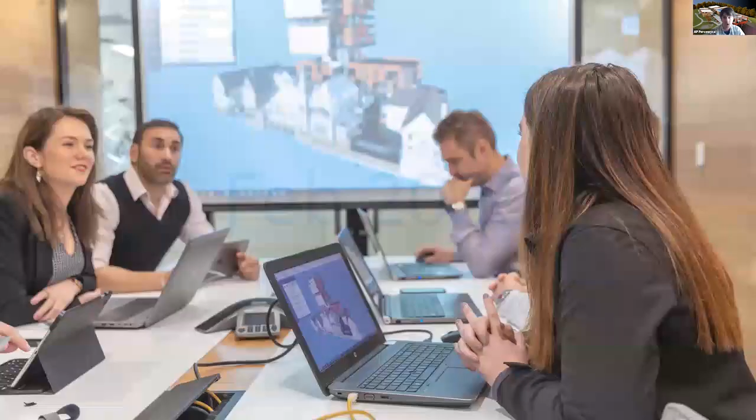So again, looking back, it's hard to believe that just a few months ago, we're talking about February, where a lot of our working environment was, air quotes, normal. It was kind of business as usual for most of us. A lot of us had projects that were mid-flight.

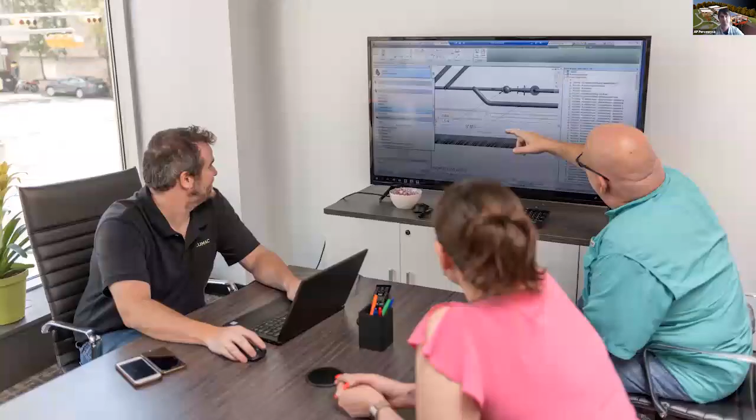We're still working in highly collaborative teams, most of the time on premises, in the same working environment, maybe going through things like design meetings, looking at site execution, planning, different review type meetings, working through design development, detailing, maybe coordination with outside companies, consultants that we're working with on a day-to-day, and even general production activities.

These were all centralized typically in office environments, where it was very easy to reach over a cubicle, reach across a table, and connect with a colleague to discuss a design issue. Even things like defining processes, looking at inter-team workflows, looking at kickoff meetings for projects - these are highly interactive, typically in-person meetings or needs that now we're all basically reacting and having to scramble to figure out what is that path forward. How do we effectively manage some of these processes again in this new working environment?

And I'm sure a lot of you can relate to some of those scenarios in terms of being able to work through it. And in the span of literally a month, from February to March, everything basically changes. This might be relevant to you guys - obviously we're on Zoom right now. This is a meeting that we had for a colleague that was actually switching roles.

Generally speaking, this would be our Denver office meeting together for happy hour. For this example, we're all just on a Zoom chat, trying to keep some level of connectivity, some level of camaraderie together as a group.

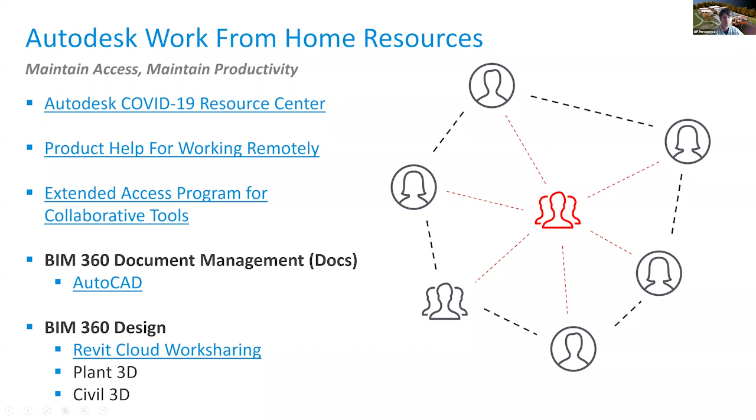All right, pushing forward. I'm going to try to get out of PowerPoint as quickly as possible for you guys.

It's not my preferred method of presenting, but we're going to start off talking briefly about the BIM 360 platform. For those unfamiliar, BIM 360 is meant to be an all-encompassing project environment, facilitating early design processes all the way through building life cycle into operations. We have a lot of customers that use BIM 360 to execute all the way through construction and then into operations, using this platform as basically a digital twin environment of their facility. Any ongoing projects operate through the platform, which serves as a common data environment for the entire project.

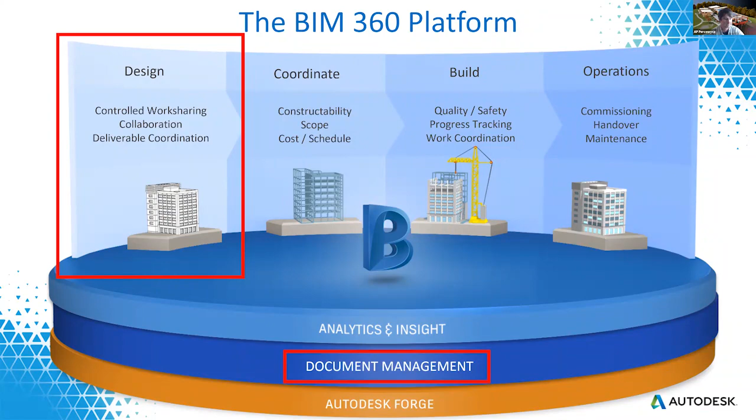Just to outline some of the other capabilities, we're going to focus on the top two highlighted, but this platform is meant to facilitate constructability reviews, run clash analysis on different trade or discipline models, track RFIs, track submittals, and shifting into construction activity, working on the construction management side of a project. How are we tracking things in punch lists? How are we assigning issues across different consultants or contractors coming into the project, making sure we have proper communication and tracking in a project environment. So generally speaking, a lot of capability there.

We're going to focus mainly on these top two, which mainly serve on the front end of a design project.

Mike, I see a couple things popping up in the chat. Is there any questions worthwhile to address right now, or should I keep pushing? It's up to you, they are on point from where you're at right now, but they can also wait till the end. Sure, yeah, let's go ahead and address them.

So the first question is relevant to BIM 360: is there any plans to migrate off of BIM 360 in the future?

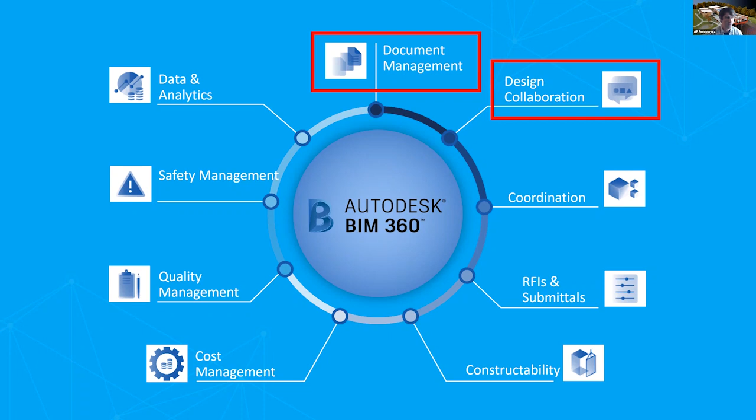So to start, guys, really I'm going to go into BIM 360 document management. You might hear me refer to it as docs. Really, this is the foundation, one of the foundational pieces to BIM 360, and it's generally the main access point into any cloud services from an Autodesk perspective. So I'm just going to pop open some slides that generally outline some of the capabilities within the document management service.

What's important to understand, first of all guys, is it is completely a cloud environment. So any web browser, any mobile device, iOS, Android, you can basically connect into your data structure, anything that's been uploaded or populated inside of BIM 360. And what you guys will see on screen is a general folder breakdown structure that hosts your files. Nothing super fancy right off the bat.

But it is important to understand that it is built to not only facilitate the work-in-progress motions that design teams need to go through to progress designs, but it is meant to distribute documentation to outside parties as needed. So everything within the system is permission based, and you can manage that at a folder level. So if there are certain places where you don't want everybody, maybe consultants, maybe a client you're working with, to see certain pieces of information, you can manage that in terms of the permissions those users would have in the system.

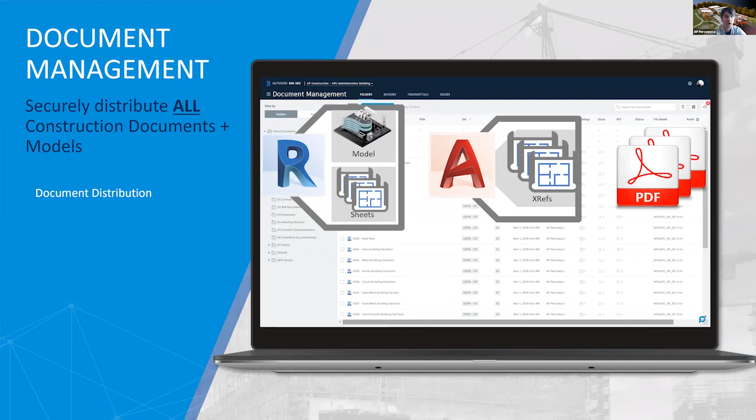Much like a Bluebeam type motion where it links a lot of the documents together, I can manage the sets associated with this data. So if I have a model that is my addendum number 1 that I want to distribute out, I just select what sheets I want in Revit, upload it into this environment, and choose to have the set affiliation come through as well. That makes the document management process a lot easier to manage.

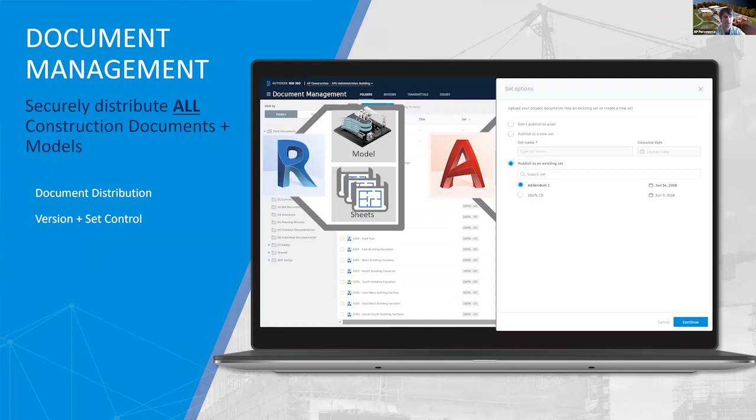I already touched on it, but permissions are a big piece of this, right? So if I want to restrict access to different roles, to different companies that I might be working with, I can certainly customize that out as needed.

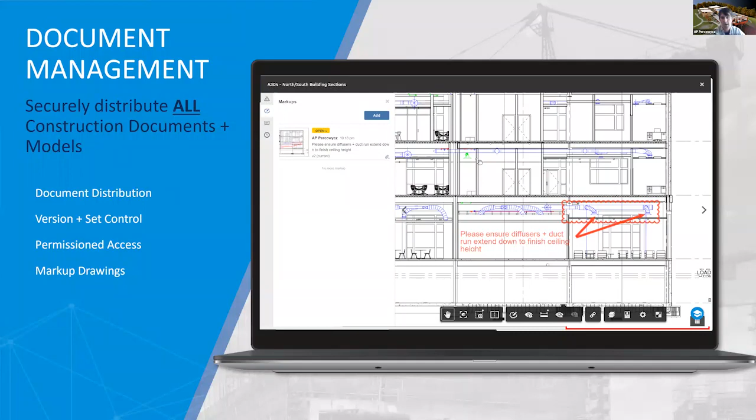And really a backbone here, guys, that we'll talk about a little bit further on in the demonstration - I do have the capability to add markups, track issues, and have a higher level of communication across my internal team, even outside consultants or contractors that I might be working with. If I need to articulate intent or clarify issues, that's a fundamental piece of what BIM 360 is meant to facilitate in a project setting. We'll go further in detail in a little bit here.

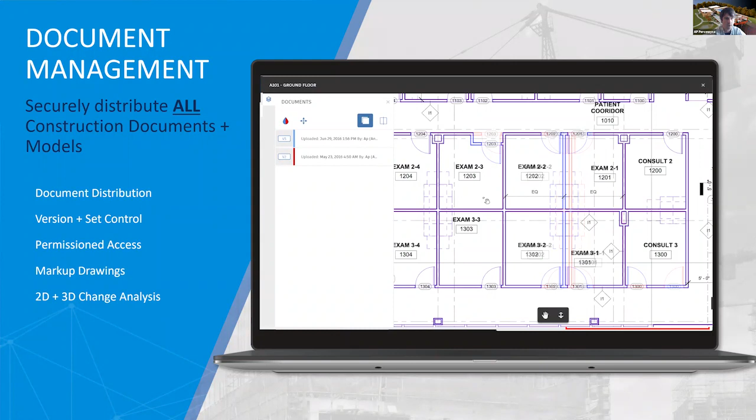Another aspect to understand: when I upload documentation and it's tracking versions or addendums, I have the ability to actually visualize changes going on in my project. On a sheet to sheet level, I could see the changes colorized on, say, a PDF drawing or an AutoCAD file. Same thing with Revit - I can get a version comparison going where it will colorize objects in my model and tell me what's been added, modified, or removed version over version in my project, effectively facilitating that change management process, but also informing the team, whether internal just for architectural scope, of what changes have been made and what impacts that might affect.

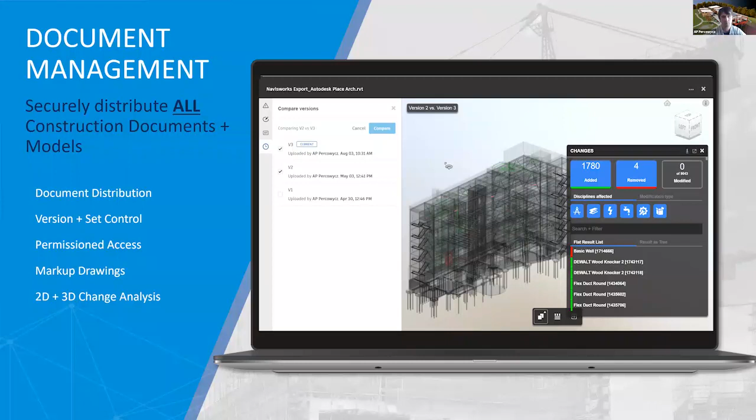But even when we think about this in terms of multiple companies coming together in one environment, understanding what the other disciplines are manipulating, what they might have changed in terms of scope, how that might affect what I need to change in terms of my architectural design - trying to bring some of those changes to the forefront to the team, whether internal or external. We'll go in greater detail on that when we talk about the design component as well.

One of the other aspects here, guys, is really the ability to customize our review processes in the system. I have the ability to set however many steps of review processes I need, include different personas to those steps, different companies, set timelines in terms of how long they should have to review something, and set approval statuses or names on the back end. It's a workflow engine that you can customize in the project setting to allow it to fit your needs.

There's no limit to the number of approval processes that you want to set up. So if you're going through a document review before a milestone, you can set that up as a specific stepped review process. If you're going through maybe a submittal review and you want to work through multiple steps, you could set that up as a separate workflow with a separate number of steps. So a lot of customization, a lot of capability in terms of the way you set that up and manage it within your individual project settings.

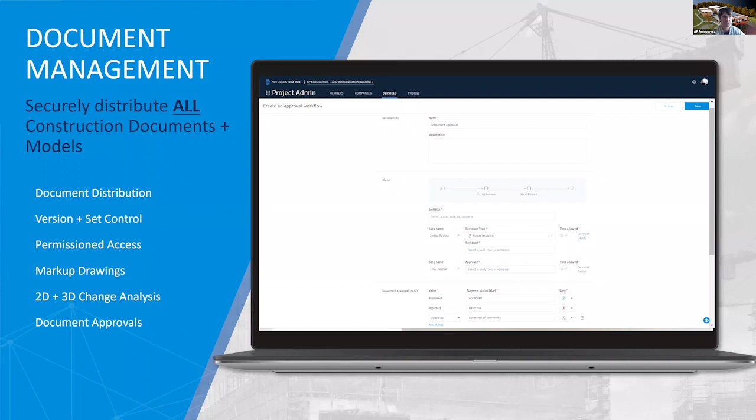And really, lastly, guys, when we talk about document management, I wanted to touch on its ability to host AutoCAD files from a working environment standpoint. If I host or post AutoCAD files inside of BIM 360, I have the ability to actually lock those files, and I have the ability to open them directly from BIM 360 in AutoCAD, work on them, and save my changes back to BIM 360.

And again, based on those changes, the versions are tracked, and the user information in terms of who made the last modification is tracked. And then, like I mentioned, the ability to lock down files so you don't run into situations where multiple people are trying to operate or work on that same file at the same time. So those are some general bullet points around the document management service.

There is a lot more capability baked within it, but for the sake of time, guys, I'm going to press forward, and then I'll leave some time here at the end where we can have some general discussion, and I'll actually jump into the tool and demonstrate a few of these activities live for you as well.

So switching gears just a touch, document management, like I said, is the foundational piece to BIM 360. There's an additional component built on top of it that is more Revit specific, and that's at least the lens that I'm going to speak to on this call. I did mention there's a Plant 3D, a Civil 3D aspect to it as well, but I'm going to focus mainly on Revit for this next portion.

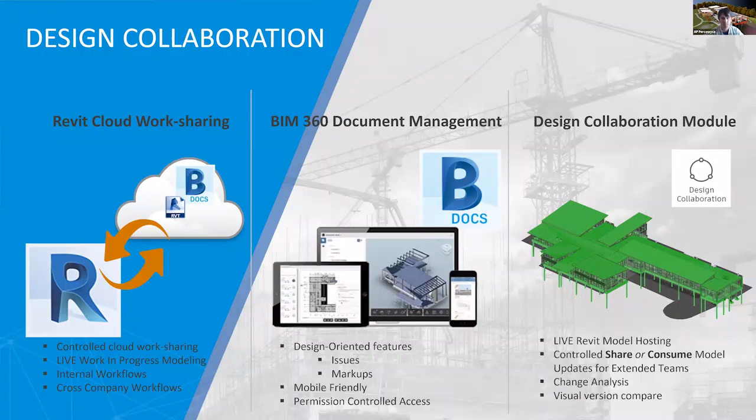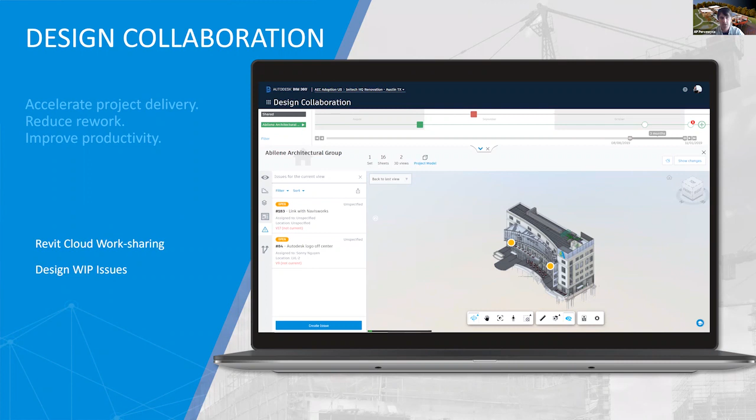You'll see different pinpoints on the model in this case. Those represent different issues meant to be collaborative across maybe an internal team, maybe across a different company. So if I'm dealing with a shaft location that I need to shift based on a structural design change, I track that communication using these issues. It allows me to assign it to different companies, different users affiliated with my project, and keep things organized as I move through this project environment, making sure things are communicated and closed out effectively.

I mentioned it early on, but this is a good example of it. We talk about a more structured approach to sharing information across teams. I know I've been guilty of it in the past, right? I've had to shift ceiling heights, circulation paths, different design options that I'm working out from an architectural perspective.

In the past, we always used to articulate our changes via revision clouds, maybe share or post an update of our model once every two weeks, maybe once a week. But it was always really hard to understand what changes we were articulating to the team. Those revision clouds get kind of cumbersome to manage. And what's further, it was even harder to figure out what the other teams actually changed version over version in their design effort. Sometimes the narratives were not very clear. It took a lot of onus on the end users to dissect the model and understand what changed. This change visualization aspect allows you to compare version over version of that model.

Say for architecture, what you're seeing on screen is basically a colorization of those changes. So I can very quickly understand, okay, we changed these ceilings or these specific objects. And what's further, the other teams that I'm coordinating with can see those changes as well and react appropriately to those outputs.

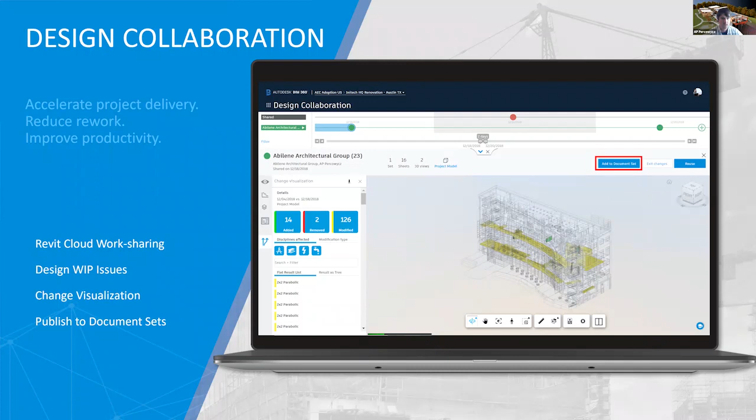Sure. One of the questions was about the extended access program, which, as you said, was an adaptation you made for the client base early on in the process, which people appreciate. But for folks that might take advantage of those extended access tools, and then when they expire or they get back to the office and decide it might not be worth the cost to pay the subscription going forward, how do they migrate the data back? Is it lost, or is there a way to keep that in progress?

Great question. That's a conversation we're having quite a bit with companies I've worked with directly, a few that have included a couple hundred people in this trial program. There is a cost to the software, to be frank, I work for Autodesk. It's not always free, but in the short term it does provide a good means to work for free. In terms of migrating on the back end, it's really as easy as picking a date and time where you choose to pull your project off of BIM 360. All that looks like is downloading the Revit file and re-hosting it on your local server where you would always have worked in the past. So it is some file and data management you have to go through, but it's a very easy process, as easy as downloading the most current iteration of that model and hosting it appropriately. Okay, great. Yep, absolutely, ready to transition to the next piece.

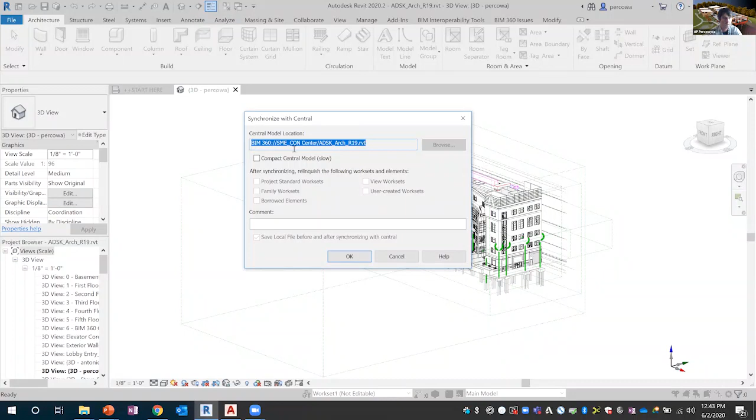It's hosted inside of my BIM 360 project. But what's important is I have the same capability in terms of having as many Revit users as needed in this model at the same time, working together. You still get the same ownership permissions for objects, so there's no way you're modeling the same thing at once. You still get those pop-ups asking you to place requests for ownership of specific elements if those situations occur. So the end user perspective is exactly the same.

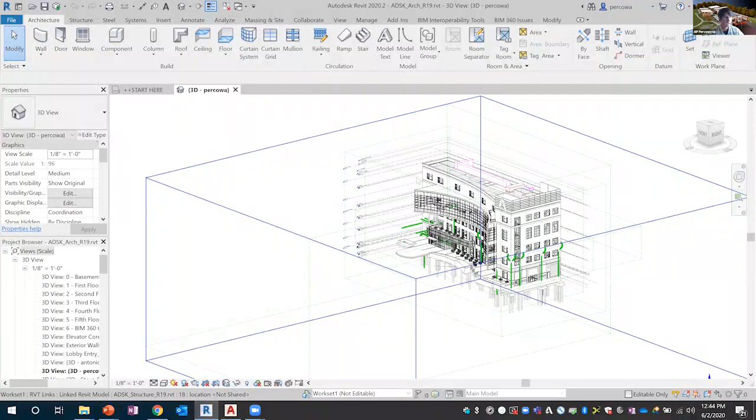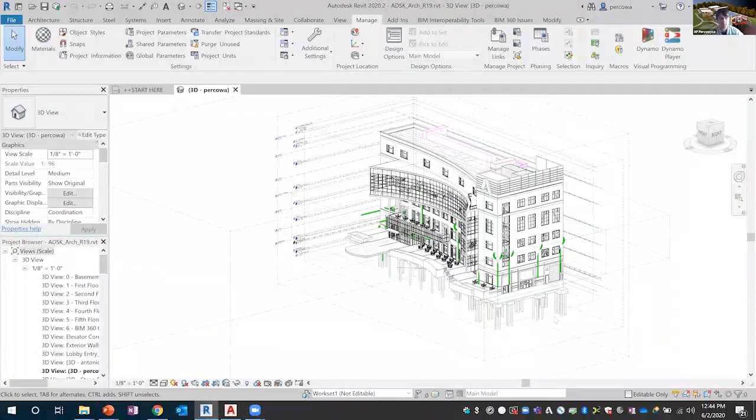When you're trying to include outside consultants in this process, it's very easy to link their information into the same model environment. Right now I'm in the architectural model, but you'll also see the mechanical systems on the rooftop, and the structural components like piers and pile caps at the bottom. If I go to manage links of this model, you'll see the mechanical model, plumbing model, and structural model are all linked in this common working environment, and all of those models live in BIM 360 in that same project.

Why I like pointing that out is it's very easy to essentially manage the process of sharing files and getting people aligned in terms of where information should live, using this BIM 360 environment.

Just for context, in my job in architecture I was kind of a quasi BIM manager, project manager, project architect. I spent literally every Friday afternoon strictly managing our files from the 8 different consultants we were working with on our big projects. That was a lot of data management - a lot of uploading and downloading off of FTP sites. Using a tool like BIM 360, if we're centralizing all that information in a common workspace, the file management aspects of a project just fall away.

Essentially, I can structure the workflows in my project to make sure I'm getting updates at appropriate times from these consultants, and facilitate not only the data, but that communication process that should happen between those updates.

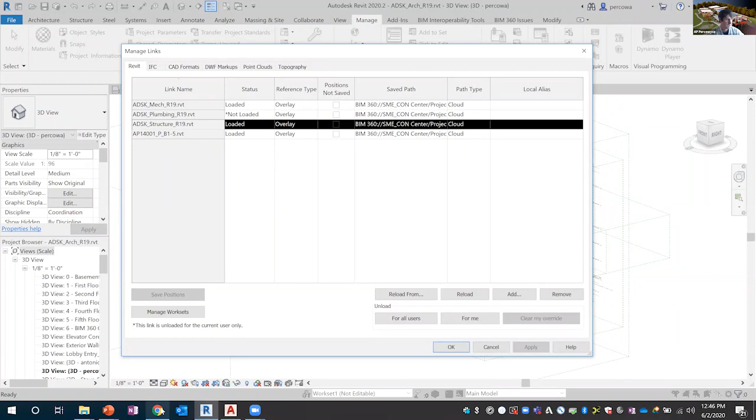Another benefit worth stating: a lot of companies have their Revit end users that are important to remain productive, but there's also a need for principals, project executives, maybe even project managers who never have any Autodesk software installed but still need to interact with it from a review standpoint. BIM 360 does provide a very good access point into this information.

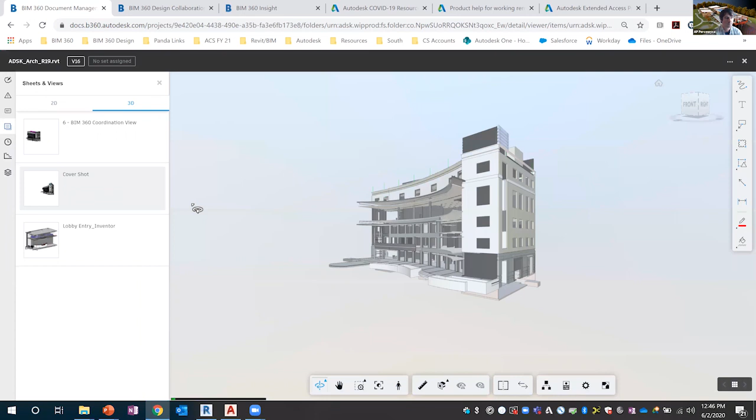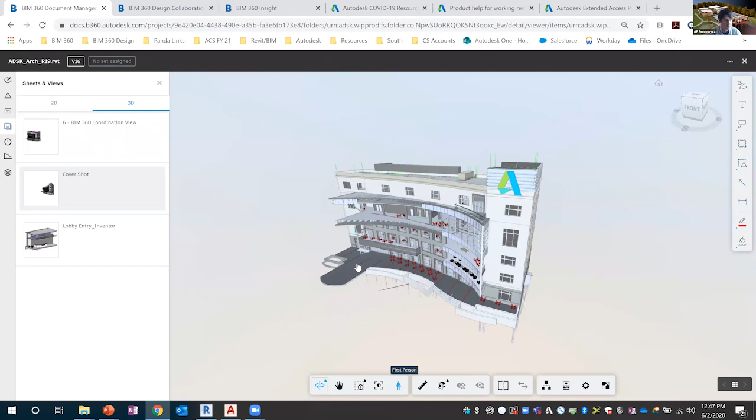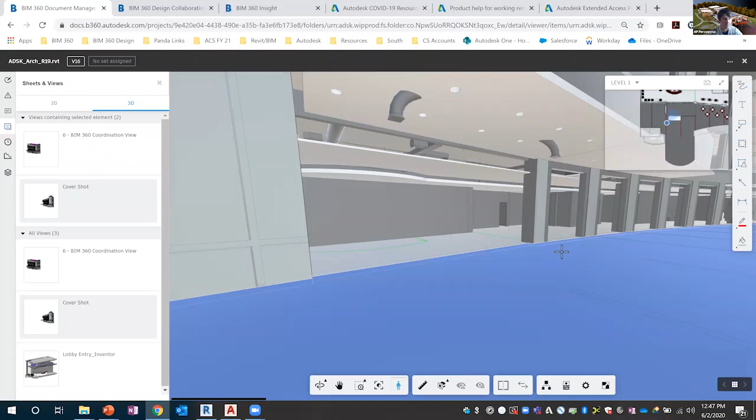I can click on this model, and it's going to show me a viewable file of the last milestone update I pushed out of Revit. So I have a model viewer readily available. I basically just need general access capabilities into this web browser environment, and I'm able to interact with this model - I can orbit around, jump into first person mode and start navigating the model environment right from day one. I don't need to be a Revit guru, I don't need to have Revit installed at any capacity. I can literally just jump into this model and start navigating it using this web browser.

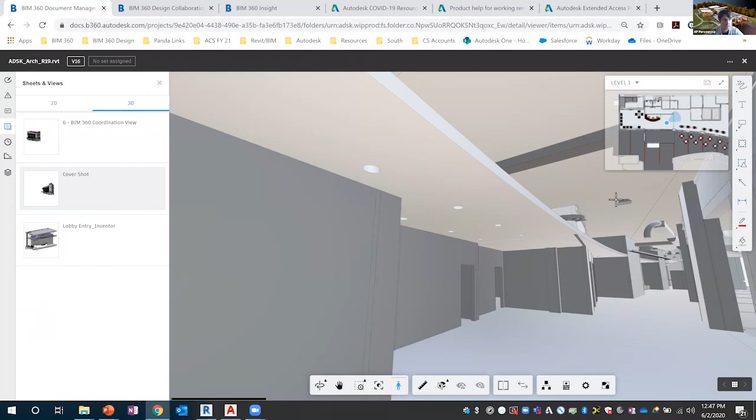I'm just using my keyboard, directional arrows, to walk around and look around this environment. Let's say I'm looking at overhead conditions and I want to hide my ceiling conditions - I can do that. I can look at the ductwork interacting with the structure, interacting with the fire protection, really that fully aggregated environment to my project setting.

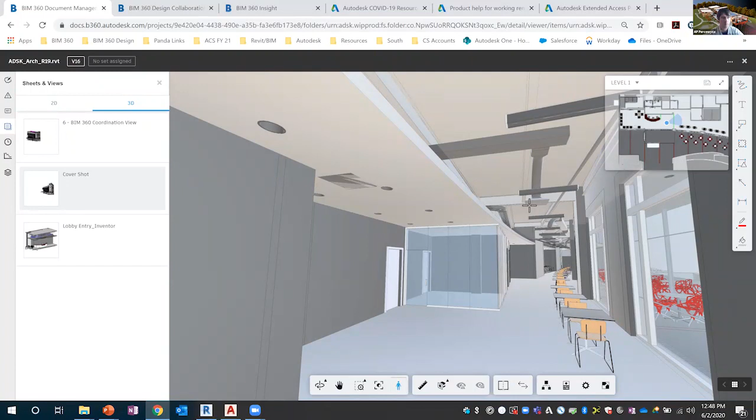When we talk about review, I'm not going to get into all the details of the picks and clicks to that workflow, but I do have a general markup tool set readily available to me right from this viewer. So I can start adding markups, and I can assign these to other users that I might be collaborating with.

I can assign issues as needed, whether I'm in the 2D documentation or the 3D views of this model. This really allows me to start using this platform as a means to communicate my project. In lieu of breaking off into email with attachments, I can centralize communication around the most current, communicable information, or the most current iteration of my document set or 3D model. And if I'm managing things like RFIs or submittals, I can do the same thing when trying to communicate across a project setting. The strategy here is centralizing these communication aspects that happen within a project. So I did want to go through that briefly.

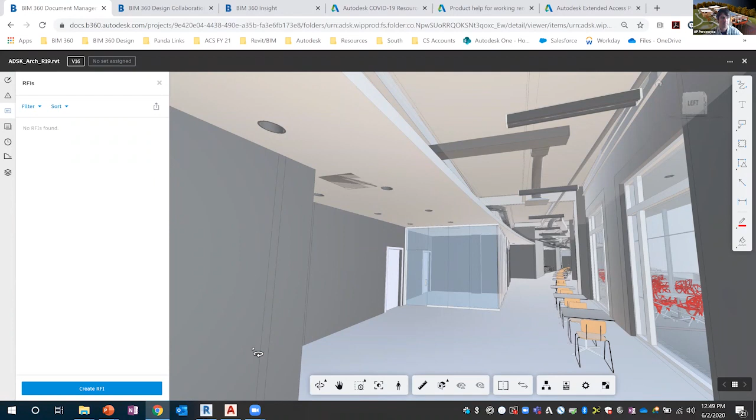Mike, I know we're coming up on the 10-minute mark. I did want to leave some time for discussion. Really the last thing I'm going to show here, guys, and then I'll open it up.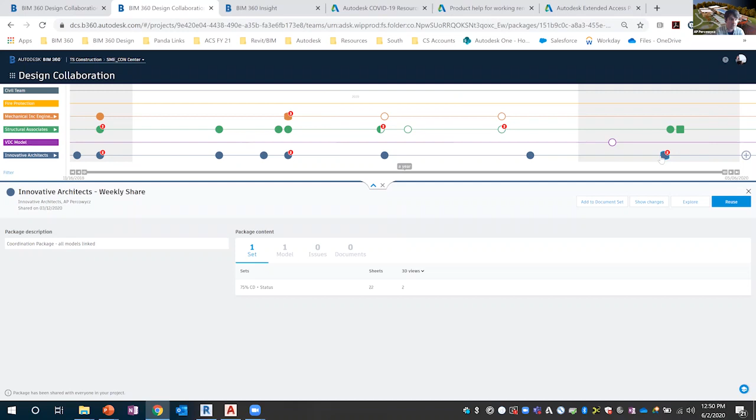When we talk about this design collaboration module more specifically, here's my project timeline that represents potentially the different companies coming together in a project. What's important to understand is it will go back through the entire history of my project as long as I've been using the service. Each of these nodes represents different times in my project cadence when teams have shared updates to their models. So if I need to dissect a date and time or a release package that might have impacts for my scope of work, I can click on that node and go in and say either explore, which takes me to the model viewer, or click on the show changes aspect, which visualizes my model.

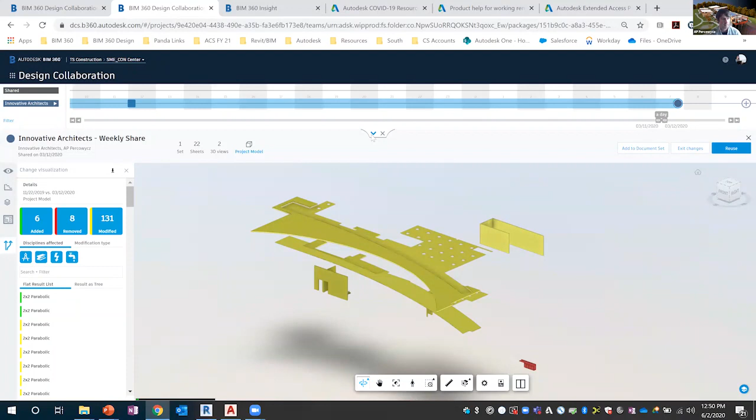It gives me a deep understanding of, between my last share of information for architecture, which in this case goes back a couple weeks, what changes happened on my model information. And I can click on these things. So I can understand that my compound ceiling shifted by 6 inches, up in this case, between November of last year and March. Understanding this change analysis, and even being able to toggle back and forth between those changes, is a big aspect of the strategy Autodesk is taking to integrate not only internal teams to understand the design process better, but the overall project environment, cross-discipline, cross-company.

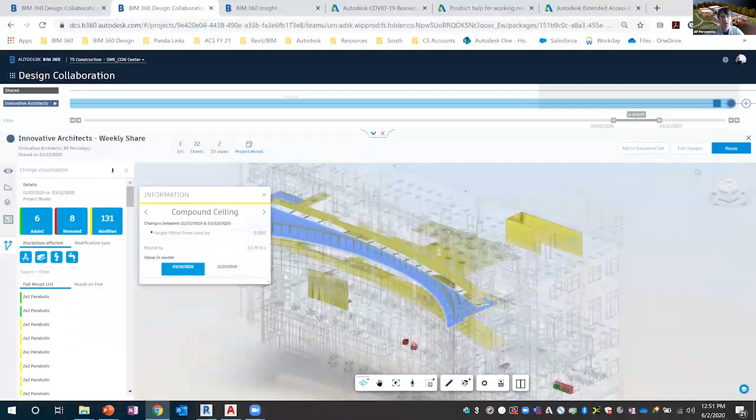Mike, I didn't want to turn this into a big sales pitch, but we shifted into the software pretty quickly there. I really just wanted to expose the group to some of the capabilities Autodesk has been working on in this environment, all with a backdrop that from day one you can sign up for this trial, host your information, and get up and moving quickly with a lot of these back-end capabilities that you don't need at day one, but might potentially grow into when you look at other projects or other ways of working.

Well, you got to speak from what you know, and this is the product you know. That's right, so we appreciate that.

Building on that last point, has the onboarding process changed at all for customers that take these new platforms on board? Yeah, that's a great question. I worked with our adoption team for about a year inside of Autodesk, and in the past when we talked BIM 360, it's really been more of a construction-focused tool stack that got that adoption attention, and that's shifted in the last year inside of Autodesk. So we now have a dedicated team that works directly with design customers to get you fully onboarded, set up your project environment, define the workflows as needed, and make sure there's alignment on an individual project basis in terms of expectations and the way things should work, which really hasn't been there in the past. I'd say even 9 months ago it was not there.

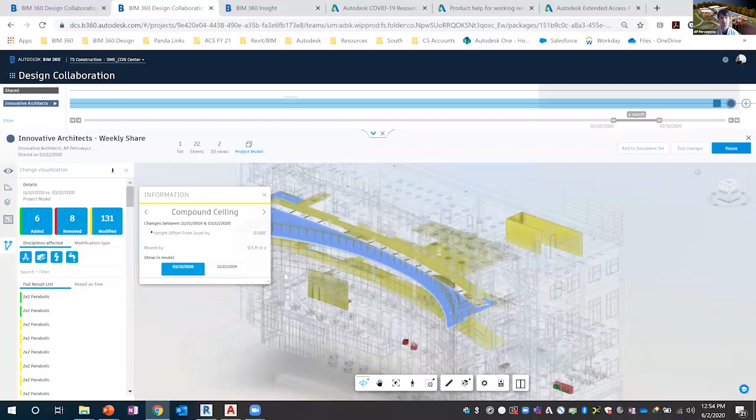For me, I spent a lot of my time last year actually going onto job sites and meeting with full teams, owner, architect, engineers, contractors, fully in one space. Obviously with the new working environment that's shifted, but Autodesk's focus has been in the cloud for easily the last 2, maybe even 3 years, has been a strong focus for Autodesk. Not to toot our own horn, but we are a little bit ahead of the game in terms of the way we can interact and help project teams scale even remotely.

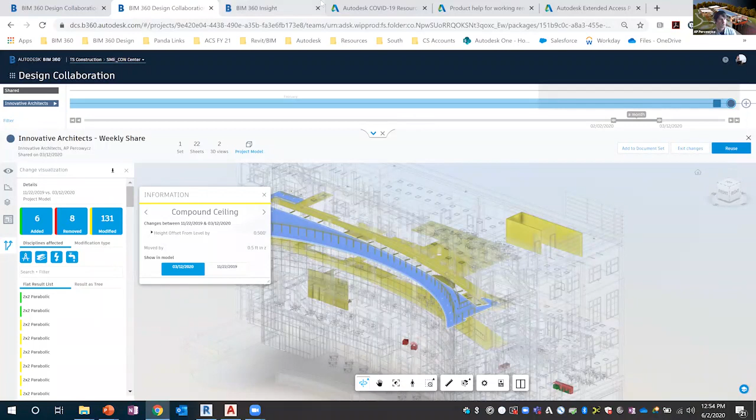So if you haven't been a customer before and you want to take advantage of this extended access program, what does somebody do? I'll pull open the main page for this extended access program. If I scroll down here, these are the eligible products in the access program. You'll see this BIM 360 Design that's more focused on the Revit component, and also this document management environment.

I'll drop this into the chat, Mike, and follow up with you guys in terms of getting this page out in an email as well. But really, it is as easy as going in and clicking on the appropriate service here that you want access to. I do have a couple other resources that I can provide.

This is basically an article that I wrote up that's more focused on Revit specifically, but it's a literal step-by-step in terms of setting up and walking through the Revit deployment. There's a YouTube video embedded in there. Unfortunately you guys will have to listen to me talk more, so apologies for that, but it's literally me walking through setting up a dummy account for myself and signing up for the trial. There's some best practices in that latest link I sent there.

I'm curious what products have been most popular since COVID started?

Mainly, Mike, I'd say the most onboarding we've done has been on this design component, and really that speaks to just trying to maintain productivity, right? If you guys still have projects that are ongoing, some of the deadlines don't change, and there's still the need to be able to work and produce effectively.